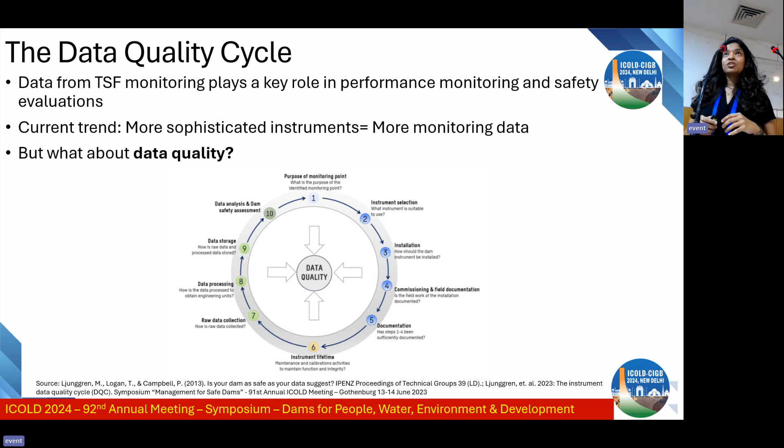So we try to look into this, but before that, whenever we talk about data in general, there is a cycle which we have been discussing over the past few days. The first thing is we need to design instrumentation - we need to design what we are trying to figure out from the instrumentation. It's not just because the instrument exists that you start plugging them in, just because we can. The first thing is if an instrument doesn't give you an output which is relevant, it's basically not needed. So that's where you start your design. And then you basically pick which instruments can give you this kind of output, and then you design where they should be strategically located.

The next part comes in with installation. So the installation has to be carefully done in a proper way so that the instrument performs the way it should. We spoke about how Pierre gave us an insight about how instrumentation installation can go wrong, and we saw that it can go wrong in a million ways, and there are even more million ways to worsen it even further. And then the main point is instruments don't live forever.

So they basically - okay, Anshad, you're supposed to be on the panel. Sorry, I saw you in the audience. I'm like, what is he doing there?

And then they don't last forever. So we need to keep track of how long they are going, and also keep doing a health check that they are behaving the way they should be behaving over a period of time.

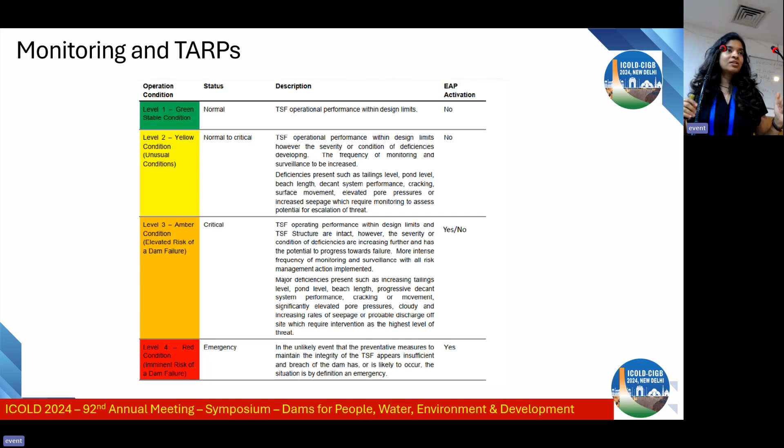And it was rightly highlighted in the last session that probably AI and ML are not there yet. Fortunately, we are not losing our jobs. So most people who work with designing or interpretation are still going to keep their jobs until maybe the coming one or two decades.

So with that, it's maybe interesting to open the panel, since maybe this has already been discussed in part, like not how much data is good enough, but what kind of instrumentation and how we should be careful installing it. Maybe we jump to the next section not yet covered: what kind of phenomena are we trying to monitor, and how good are ground sensors or remote sensing? What is good from a ground sensing point of view, and what is good from a remote sensing point of view? And can we really predict brittle failures or anything that goes, bam?

Does having a monitoring system or sensors on the ground or up in the air, is that good enough to at least sense that something is going wrong? And if so, when do the interpreters have the liberty to pull the plug and say we stop operations, we evacuate, we have to take action? That's part of the trigger action response plan. So how does this flow happen?

I think probably Malcolm can open, because he spoke quite a bit about how failure modes need to be identified and how we move to TARPs. Where do you think instrumentation fits in? But where do you think the interpretation part, which is the most critical aspect, comes into the picture?

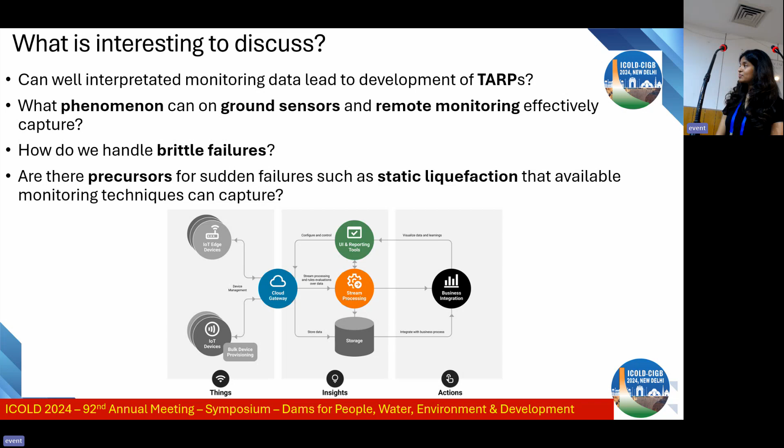I can always add to that operator part—also think through, if there's a yellow or red alarm coming, what's the context in which the operator is actually going to see this? Last year we had a small dam failure in Norway. There were no major consequences, no loss of life. But a water alarm went off and no one noticed it, and the embankment was overtopped. During the root cause analysis, it was clear this alarm was triggered multiple times over several hours. But at the same time, they had a 200-year flood event 50 kilometers upstream of this dam, so all the eyes were focusing on that part, and there were something like 200 other alarms also going on. So this alarm just drowned in the sea of alarms.

So thinking this through—are we relying on manual intervention for something to be safe? Then we really need to have redundancy and make sure that if it gets to a critical level, it really needs to go to the top of the priorities.

I think to sum it up, it looks like it should be a team effort. The people operating in the field and the people sitting in front of computers analyzing this data and looking at these alarms—they probably should be communicating.

The system should be well understood by all of them to know what's okay and what's not. For example, somebody on the field might have noticed the water levels going up, but never knew there was an alarm beeping. So it has to be an integrated team effort. You cannot rely on just instrumentation and automated systems to fix everything because you receive an SMS. You still have to think with your brain to decide whether to accept what the SMS sends you or not.

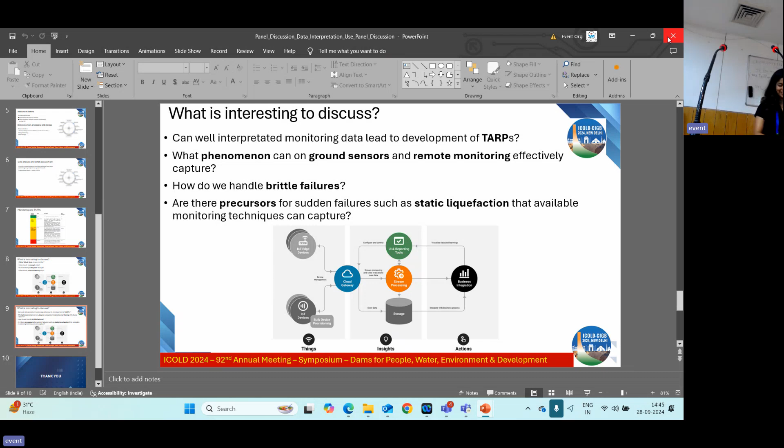I'm going to hand you over something. I think I've got some presentations for you, Vinod and Sasha. The others have already got them, I think, unless... no, I didn't. You other guys have? Alright, so come out the front. Thank you very much. You're also good, we shouldn't be photo bombing. Who's next, Sasha? Yes. Thank you so much.

Okay, so now we're going to have just a little quick session going back to our exercise. Hopefully you've still got your exercise sheets, because we've now learned how to collect all the data and interpret it. I want you to fill out the last two questions, and we're only going to have fifteen minutes. I know we've just had lunch, but we've got two choices: we can go grab a quick coffee and come back, or start doing presentations. I'd probably prefer to get a quick coffee and get on with it, but if anyone doesn't like that idea, that's fine too. We're going to do the exercise first, so grab your sheets. If you haven't got them, I can hand more out.

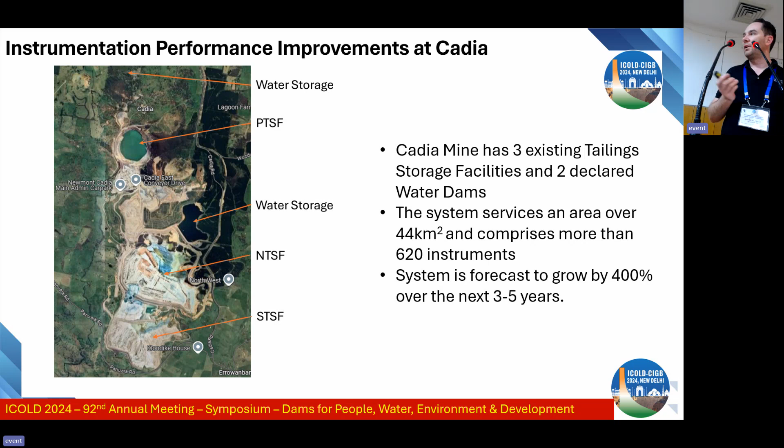Let everyone sit down before I start. Yeah, so we've got three existing tailings storage facilities. As you can see there, the NTSF, the STSF, and the PTSF. We're currently tailing into the PTSF as the other 2 are in care and maintenance following the slump in 2018. And we've got 2 declared water dams. We have a capital project which is repairing the NTSF and doing some pretty major buttressing works around both NTSF and STSF.

And Spectrum is working with that capital project to look after all the instrumentation. The 2 tailings dams combined cover an area of over 44 square kilometres. So as mentioned previously, they're quite large dams, very long embankments, multiple benches. So there's a lot of ground to cover for the guys doing the inspections. And we've got quite a large instrumentation system with over 620 instruments.

And that's not just piezos, there's ShapeArrays, a number of radars, that sort of thing. With all the planned construction coming over the next 3 to 5 years, we've forecast that we're going to see the system grow by over 400%. And that's a bit of a rubbery figure, but we've got a definite 100% growth in the next 12 months just from designs that we've already got.

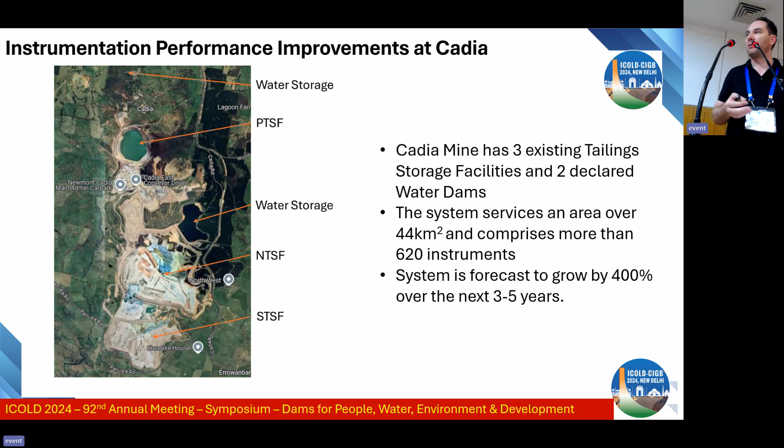So the challenges that we had when the project took over the instrumentation system, take a step back. The project is responsible for the instrumentation for the NTSF and the STSF and the water dam, which is directly adjacent to it. The other two, the PTSF and the other water dam, are still monitored by the site.

So the challenges that we had when we took over the system was it was a system that had been installed in a hurry post the slump. So it worked, it did its job, but it was now five years old. A lot of the hardware that had been used was off the shelf, and wasn't necessarily fit for purpose. And because it had been installed very organically, it was very complex with minimal documentation. So that made it difficult to maintain, difficult to diagnose any issues, that sort of thing.

And we saw that in a huge number of TARP triggers for loss of instrumentation or loss of comms. So we were experiencing too much of an impact from instrumentation on the construction project itself. And as already mentioned, an instrumentation system that's always triggering the TARP for reasons that people don't think are real is like the boy who cried wolf. People stop believing the system.

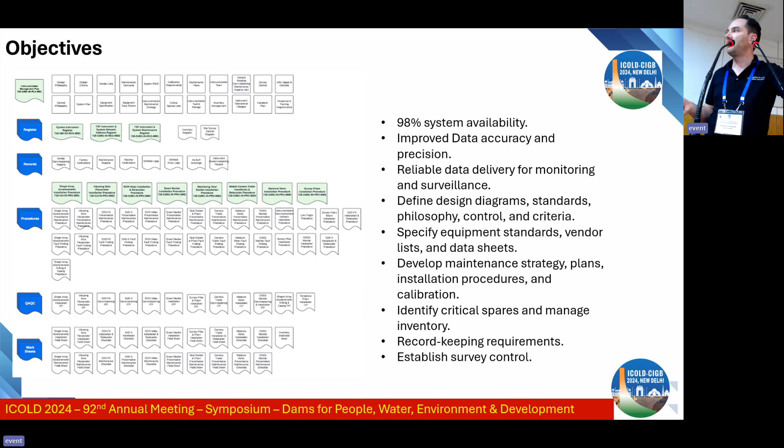So what you probably can't read, but that's all the documents that we determined needed to be developed. Overarching is the management plan, and then we've got all the standards, the procurement specifications, installation SOPs, ITPs for installation, that sort of thing. And that system has been developed so that we have the full record keeping required for future use. And obviously, being a capital project, we need to hand back a system that's properly documented to operations when the project is done.

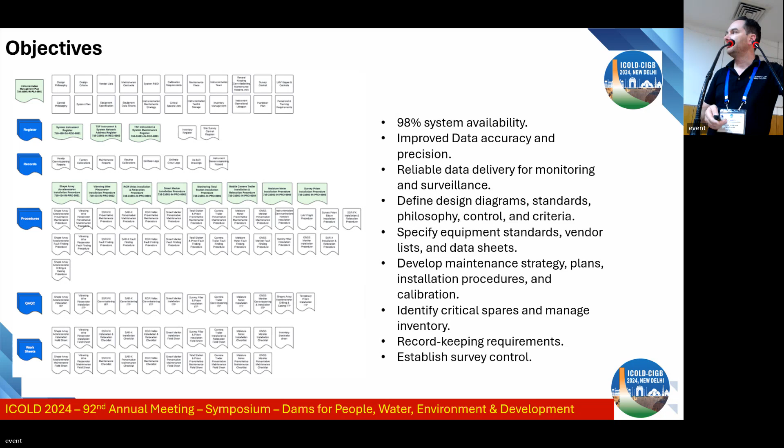So the design philosophy that we developed really prioritized standardization and simplicity across the entire system. We didn't want our technicians to be going out there and opening a cabinet and seeing something different every single time. We want them to know exactly what they're going to see. That makes it far easier to diagnose problems, and it makes it cheaper to maintain the system as a whole. You need less critical spares, you need less models on hand, that sort of thing.

Key here is all the instrumentation should inform the TARP. All the instruments should inform the TARP.

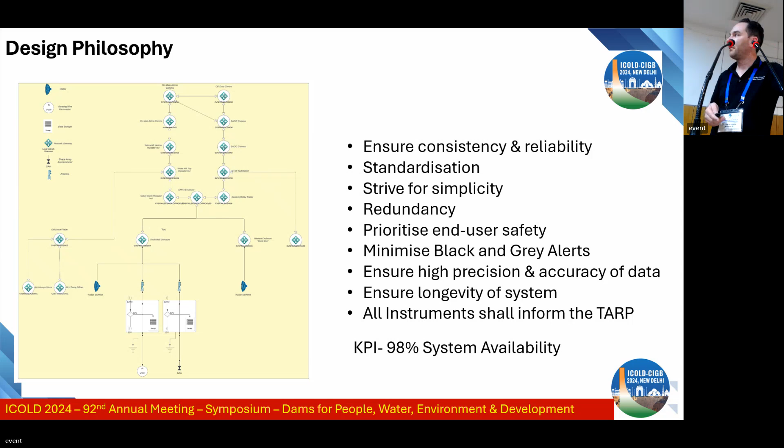So to start off with, we started looking at the prism network and the total station network and developing a robust survey control. Previously, the control had been set out by geotechnical engineers. Nothing against geotechnical engineers, but you're not surveyors.

So we had control on the embankment, which we knew was moving. That's obviously not ideal. We're still in the process of establishing a robust control network, but the control network really needs to have redundancy in the backsights, cross-bracing triangles in the control network, and the total stations should always be computing using least squares. Previously, they had been set up with just fixed points, so the total station was never recalculating its own position. So if you did get any movement in the total station, that movement was then translated into the embankment, which obviously gives you false positives.

And going with that includes having a proper maintenance, calibration and repair regime for not just the total stations, but the pillars themselves. We've got pillars out in the farms, cows can rub up against them, farmers can run into them. So you need to go out there and check them periodically, make sure they're still in place and don't need any maintenance.

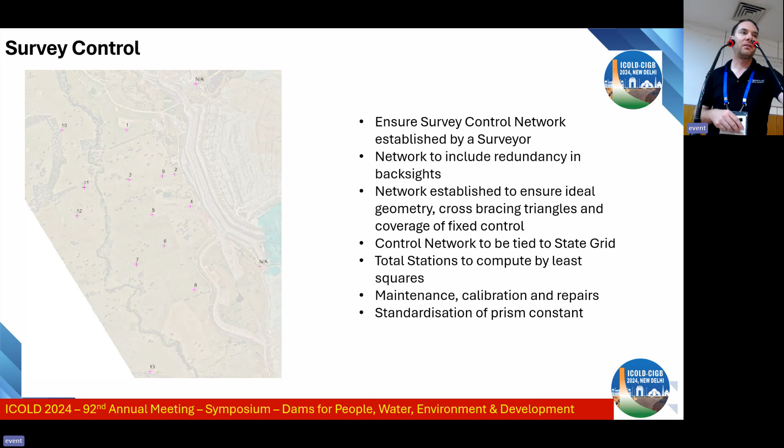Criticality. So when we were installing all these instruments and all the existing instruments, we assign a level of criticality to that instrument, and that then determines the effort put into its maintenance, and how we look after it when it does trigger. The criticality of the instrument is really driven by the FMEA. It has to be, it has to come from that.

And I need to make the differentiation here between a critical instrument and a safety critical element. So safety critical element, you may not have come across it before, but it comes from process engineering, where if you say this instrument is critical, then that instrument and all its supporting infrastructure that lets it do its job becomes a safety critical element. And if there's no redundancy, then you have to address that and maintain all that hardware differently. So the safety critical elements can be the instruments, the power, the comms, the cables.

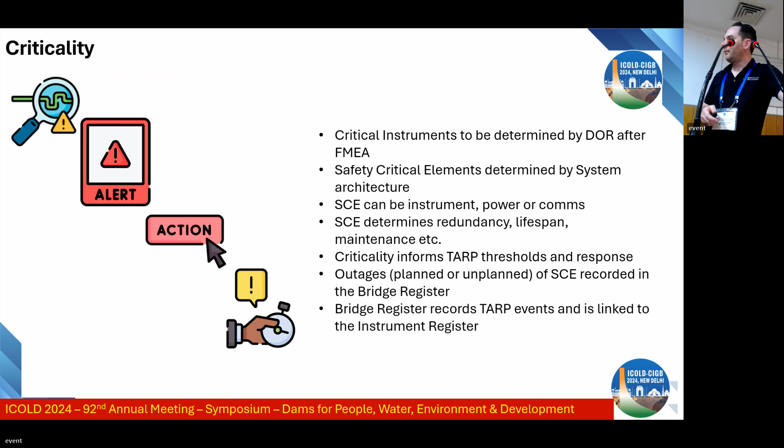And that then flows on and determines how much redundancy they have, how much lifespan you need from them, and as I said, the maintenance effort. And then any outages of instruments or safety critical elements are recorded in what we call the bridge register, which also records any TARP events.

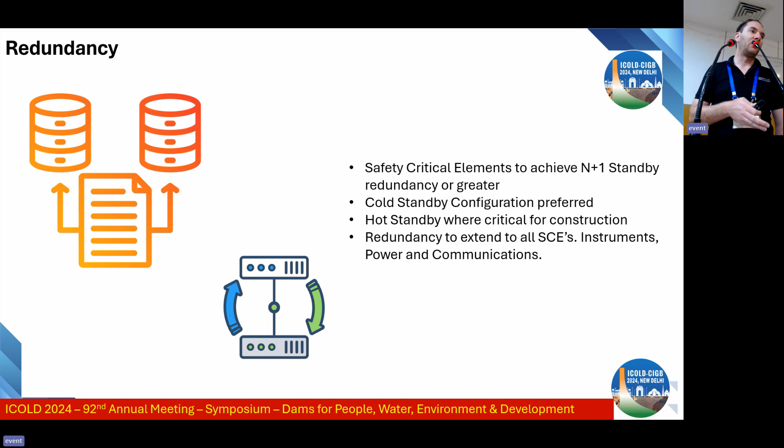So redundancy, it's been touched on a few times already. For safety critical elements, we have determined that a redundancy of n+1 in a standby redundancy or cold standby configuration is preferred. So that means, take for example a modem, like a comms modem, if you say that's a safety critical element, you have a second comms modem in the same cabinet. Cold standby means that it's not turned on, so if the one that's operational does go out, you send a technician out there and you turn on the redundant ones. The decision to be cold standby or hot standby is based really on construction and cost.

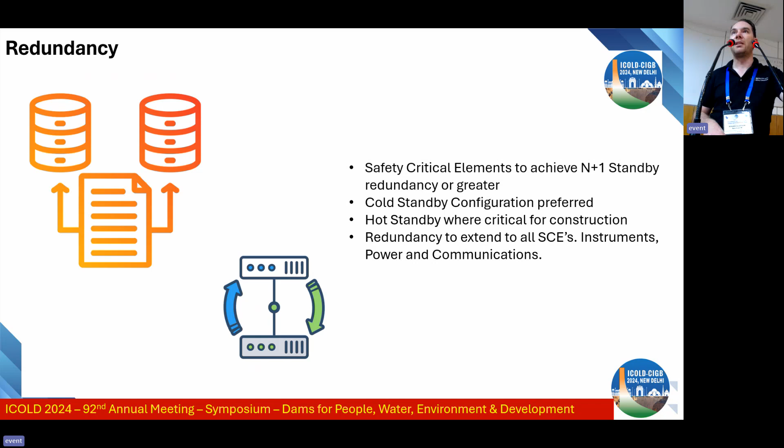We have some instruments in hot standby where we don't want to wear the cost of stopping construction, it takes 45 minutes for someone to get out there and flick it over. In other areas where we won't stop construction, we can afford to have it in cold standby, and that just extends the lifespan of that redundant piece of equipment.

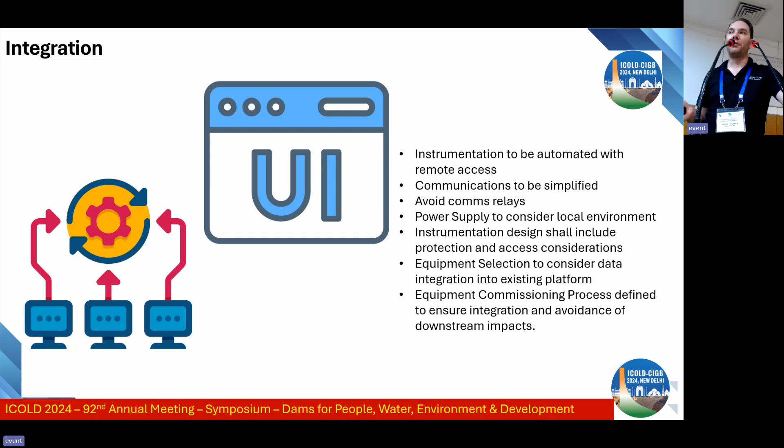Integration. All our instrumentation should be automated with remote access and integrated into a single platform. As mentioned, we have Canary, but we do have some instruments that don't go into Canary. Our radars don't go into Canary at the moment. They're a bit of a tricky one.

Currently we've got about 7 different platforms that the dam governance team and the geotechnical engineers have to monitor, and then try and cross-correlate to identify trends, which isn't ideal, and it really brings about a lot of decision fatigue for these people doing this job. So trying to integrate all the data, as already mentioned today, is very important.

As I mentioned when I was on the panel earlier, the equipment commissioning process needs to define integration, to avoid downstream impacts, like huge amounts of data flooding your server or saturating your comms.

Standardization - I've touched on it already. We have standardized all our cabinets, so they all look the same, across different instruments. This reduces complexity and really simplifies personnel training and familiarization. Our technicians know exactly what they're going to see when they go to any instrument because they all look the same.

The standardisation extends to installation procedures and safety setup around the instrument itself, so they all have a standardised general layout. If they're on the embankment, they have a hand railing, an LV park up, that sort of thing. They have bollards to prevent HVs from running into the instrument or our technicians while they're working there.

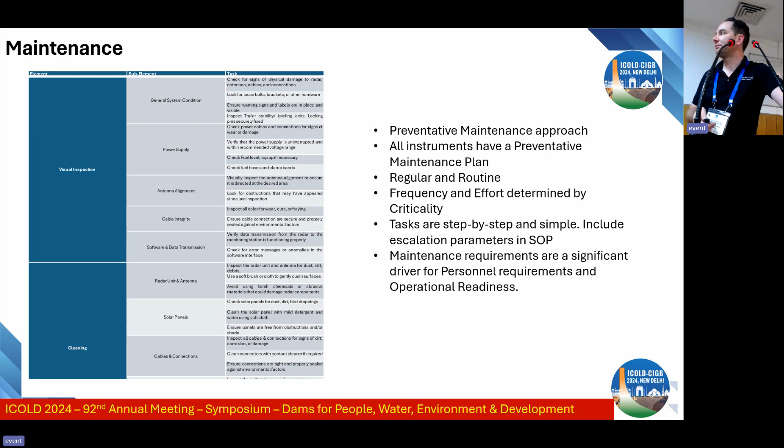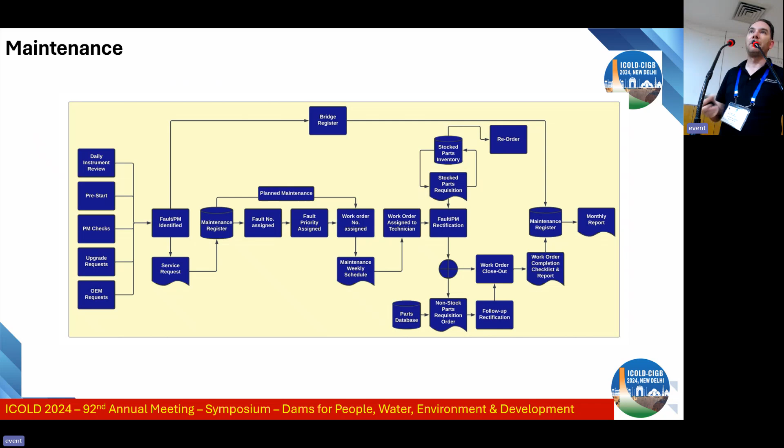The lifespan of the instruments is pretty critical. We've decided that any non-repairable or non-replaceable instruments should have a minimum OEM lifespan of 20 years. Obviously that's dependent on how they're installed and maintained, but we don't want to be installing instruments that only have a stated lifespan of 5 years. Shape arrays, for example, I think they state 45 years in the manual, if installed correctly and maintained.

But yeah, the lifespan is determined by the OEM, and then we do everything we can to keep it running for as long as possible. And you need to schedule end of life replacement.

If it's still working, don't be tempted to try and save a few dollars by not replacing it when it hits end of life. Replace it on failure or on end of life, whichever occurs first, because the likelihood is that you'll try and save a dollar, and then 6 weeks down the track you'll fail anyway, and then you'll be doing an unplanned replacement.

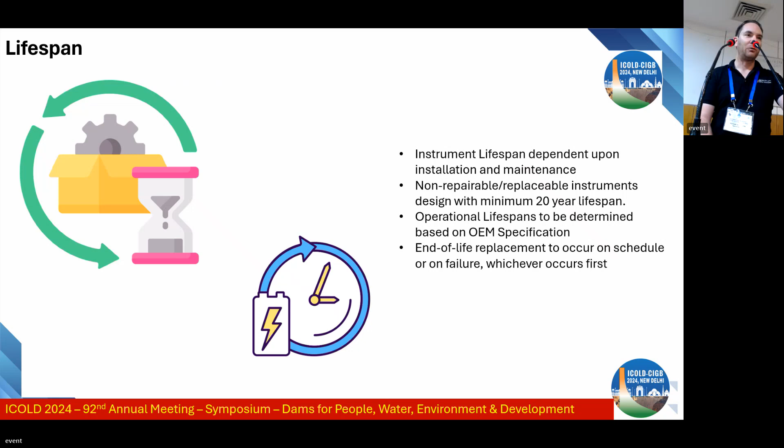Record keeping - so every single instrumentation relocation or installation has an ITP that's been developed. We've got personnel training and competencies all recorded and specified in the management plan.

Critical inventory is stored - we actually run a very small sort of warehouse using warehousing principles. And then obviously all the instrumentation installation records, all their calibration certificates, all the zero readings.

You have to have that on hand for the EOR and the DI to be able to set the thresholds. And also the installation records, like the grout records, are very important for problem solving - when you start getting some strange readings from some of these instruments, you can try and work out what's going on with them.

Vendor agreements - we may be lucky where we have pretty deep pockets at Cadia, but vendor agreements, I can't stress how important they are, especially for the more complex instruments we have out there. There's no way my team is going to be able to do medium and long-term maintenance on radars, for example. So you have to have the vendors coming out regularly to do this medium and long-term servicing on these instruments. And it also, lawyers like it because it moves some liability.

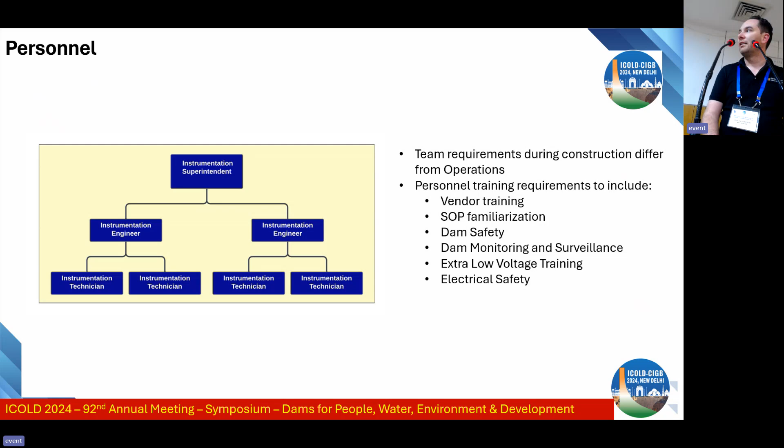And there are some pretty unique training requirements, and the skill sets for something like an instrumentation technician is, as I'm finding, very unique and very hard to find.

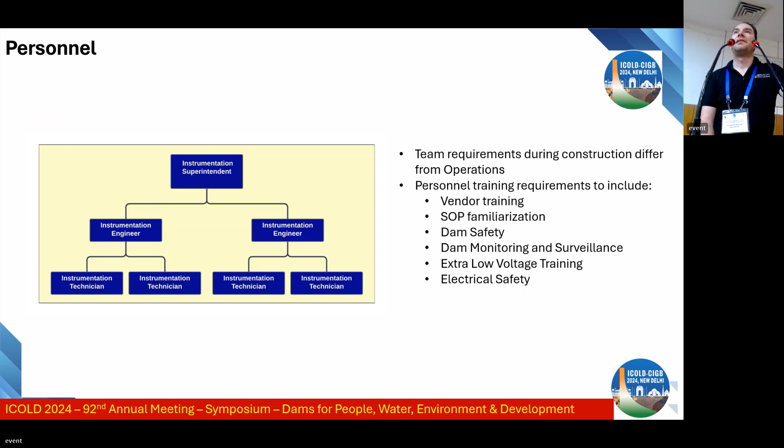So all of that comes into the dam monitoring instrumentation management plan for us at Cadia. This document is subordinate to the OMS and supports the OMS. It just essentially provides that greater level of detail. It'll be reviewed annually, but it is a live document which is linked to live registers, and all changes that occur in the registers don't actually require too much updating of the document itself.

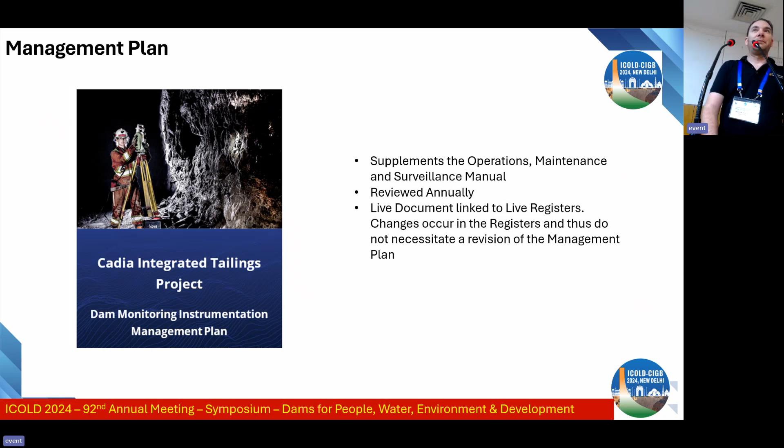But having this document is really important and has really benefited us in that it's highlighted the importance of instrumentation to all the construction guys, and they finally understand don't go out and run over a shape array, otherwise it costs the business a lot of money in downtime and in replacing that instrument.

Operational time for us is 6 a.m. to 6 p.m. A 42% reduction in TARP events, and my crowning glory, I suppose, is a 39% reduction in the single event duration — that's the time it takes when we do have a TARP trigger, for the instrumentation team to get out there, diagnose the problem, and get the system back online. Yeah, so that's it. Thank you.

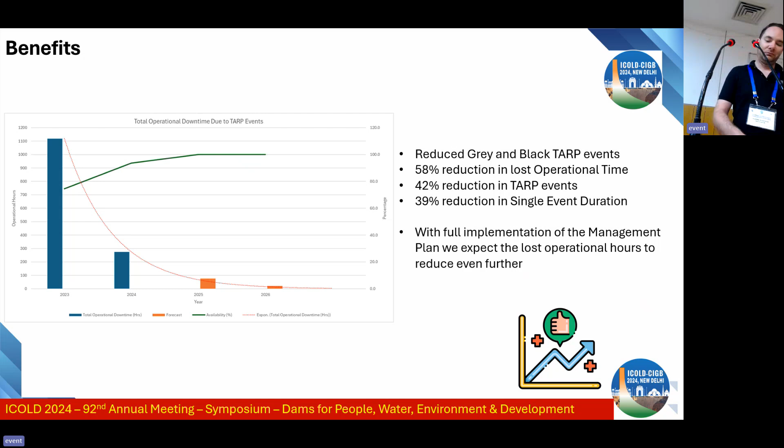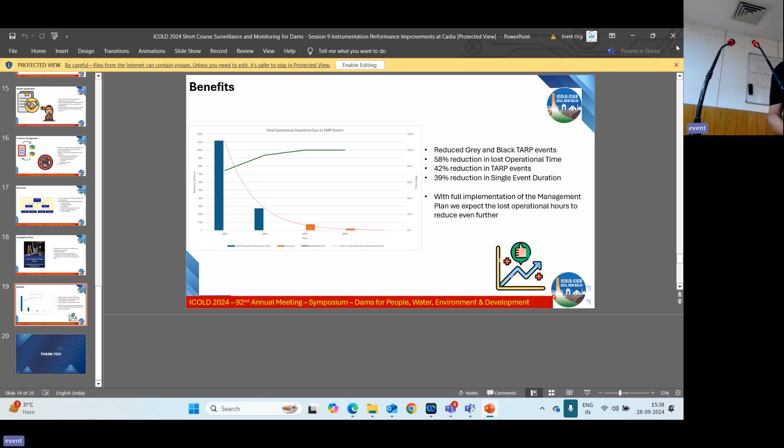Well, I think, thanks, Brian, and I guess maybe people don't understand what those figures mean because the construction operations on site is just absolutely huge. Like you've got the biggest trucks in the world and massive production in millions of tons per annum in construction works going on. Yeah — 40,000 tons per day.

So we've now been lucky to get a last minute presentation from Andrzej Krishnik from Poland. Andrzej is the leader, the manager of the monitoring team at KGHM's dam in Poland, which I understand is one of the bigger tailings dams in Europe, and it's got a pretty amazing instrumentation system by the sound of it. So over to you, Andrzej.

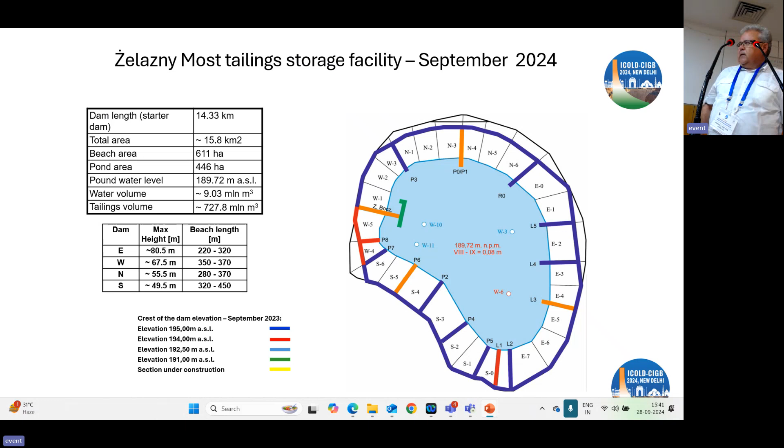Mine facility just got the elevation, crest elevation 195 meters. The highest dam height is more than 80 meters. And total area of mine facility is 15.8 square kilometers.

Tailings division manages a line of pipelines - water line pipelines and slurry pipelines - and total length of pipelines is over 250 kilometers.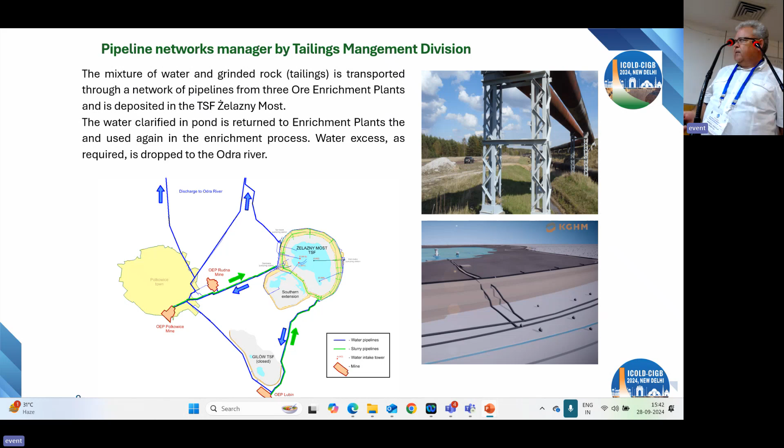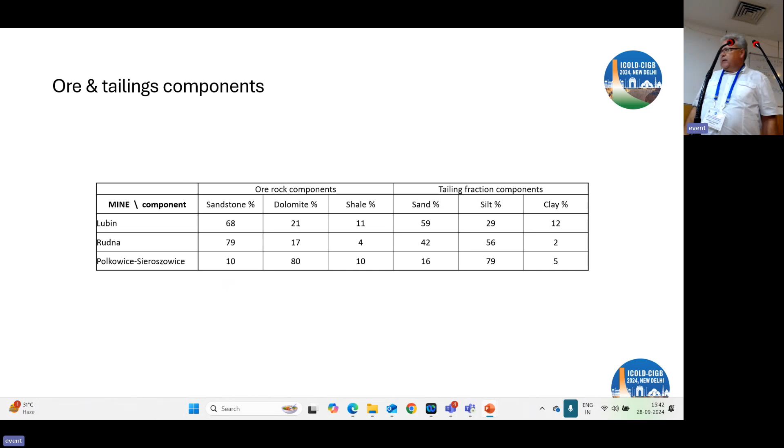Tailings composition depends on the mine. In Lubin and Rudna mine, most of the rocks are sandstones. In Polkowice and Sieroszowice, it's dolomite. So the components are sands to silts, and tailings from Lubin and Rudna mine can be used as building material for dams.

We have two different methods for exploitation. Main object is built with upstream method, and southern extension is downstream method.

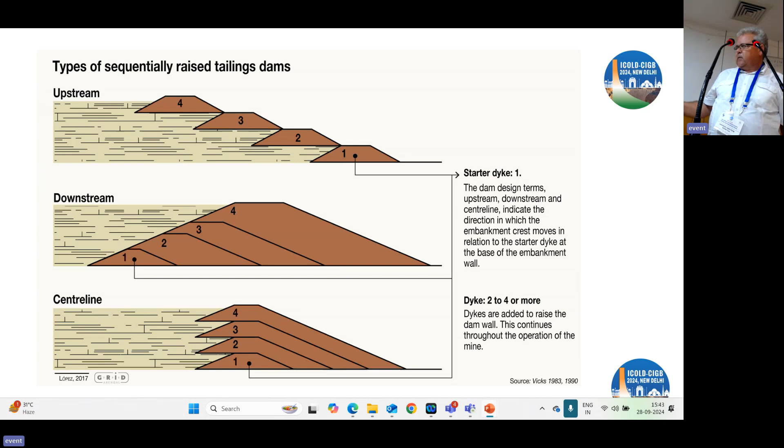Our TSF is located in the Kalinówka Brook Valley. We don't have mountains near our TSF. This image is 10 times exaggerated.

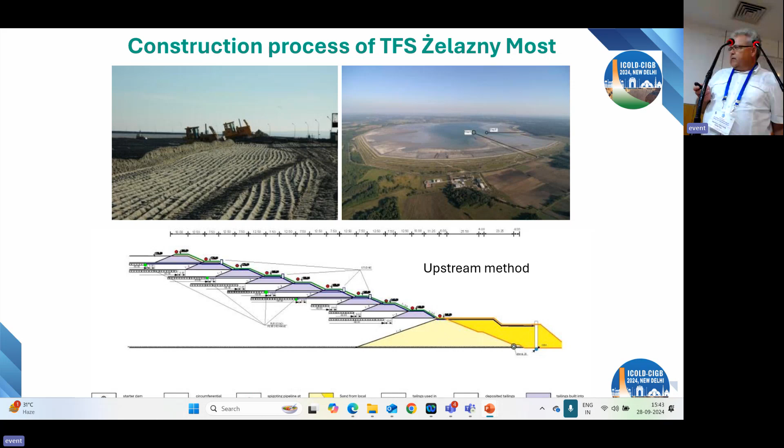This is the upstream method in the main facility. At the start, there was built the starter dam with starter dam drainage. After that, it's built from sand from local deposits.

The next shelves dams are built from sand tailings. Very important, there is circumferential drainage, which is constructed after we construct the dam crest.

We have very complicated bedrocks, mixed by glacier, so we have to use drainage and relief wells. This is a starter dam for main facility.

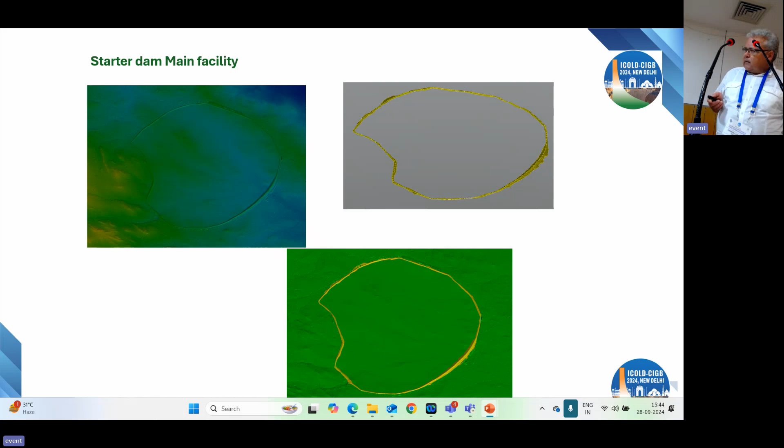The main facility is divided into 26 spigoting sections. We spigot tailings on the beach, where tailings are naturally segregated into sands and finer material, and sands are used for building the next shelves.

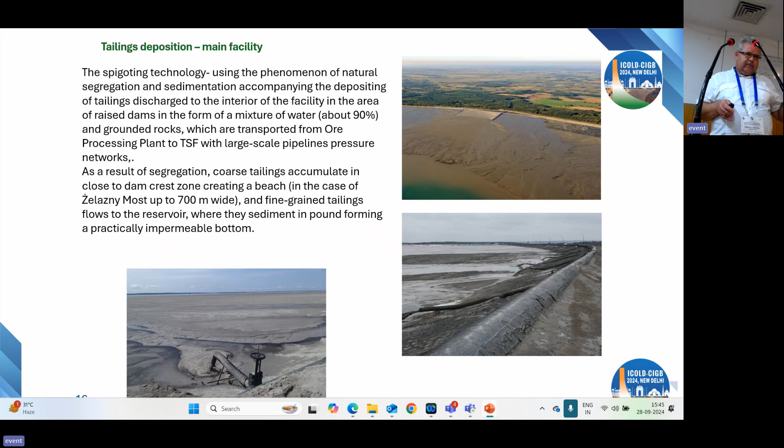The fine material is put into the pond, so it seals the bottom. It stops vertical infiltration into the groundwaters.

After filling the spigoting section, we construct the next dam, and it's very important we control compaction. We are using Troxler and laboratory tests and CPTU test for control of compaction.

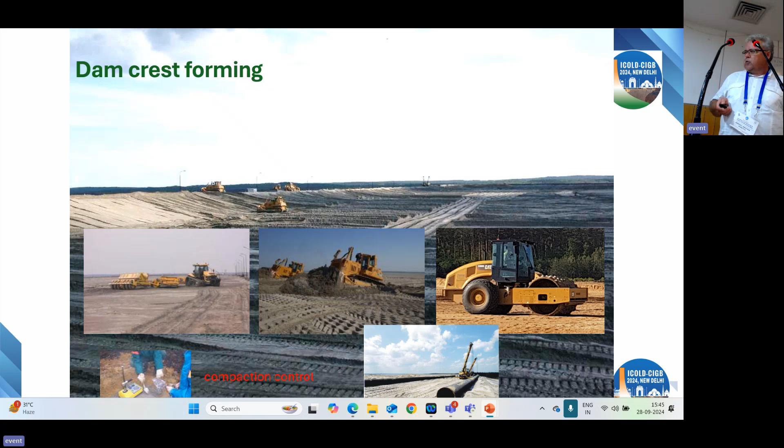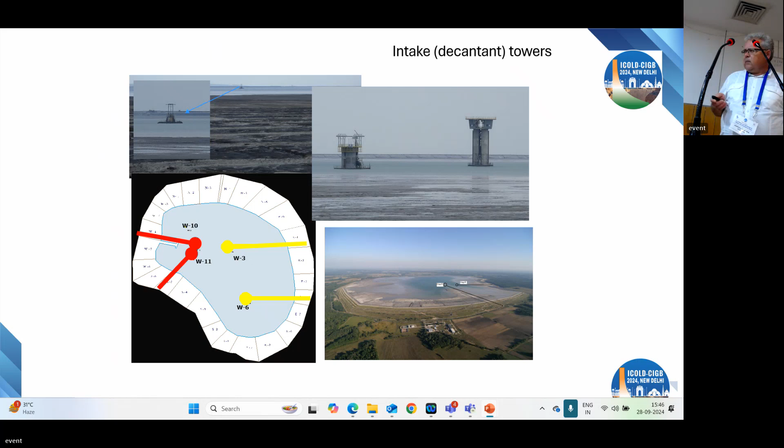Every construction is divided into 2 stages, increasing dam by 5 meters. Every stage is 2.5 meters.

After this stage, we make additional geotechnical laboratory tests to establish geotechnical parameters. We install additional monitoring devices. After that, stability is calculated, and then we start with another stage.

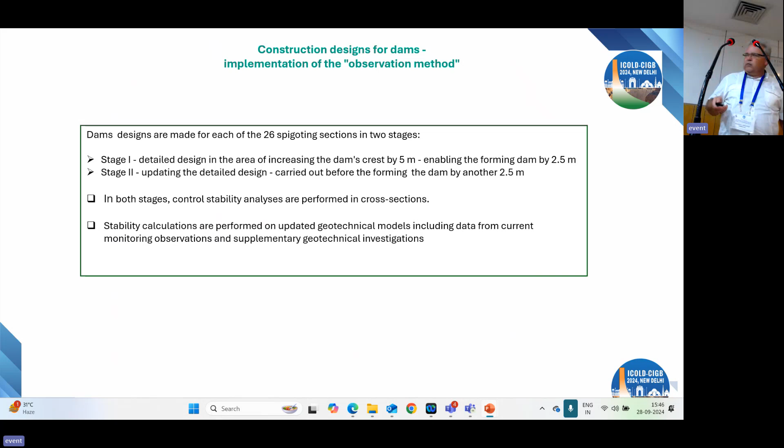Circumferential drainage is built almost every 10 meters. These are perforated pipes around the facility, and after that we build the drainage wall. It's almost 10 meters high, and it's a very important element for creation of the phreatic line.

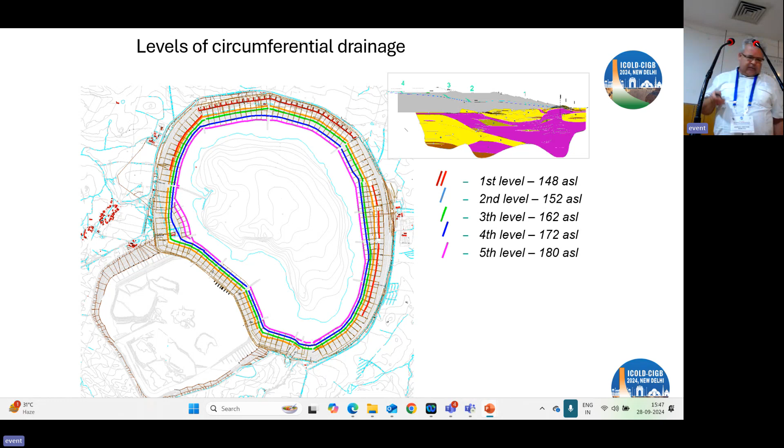On the southern extension, there is a different method. We start with starter dam from sands from local deposits. Base dam is constructed from sandy material from tailings, and segregated and compacted fine tailings are located in the middle of the extension. This is a starter dam.

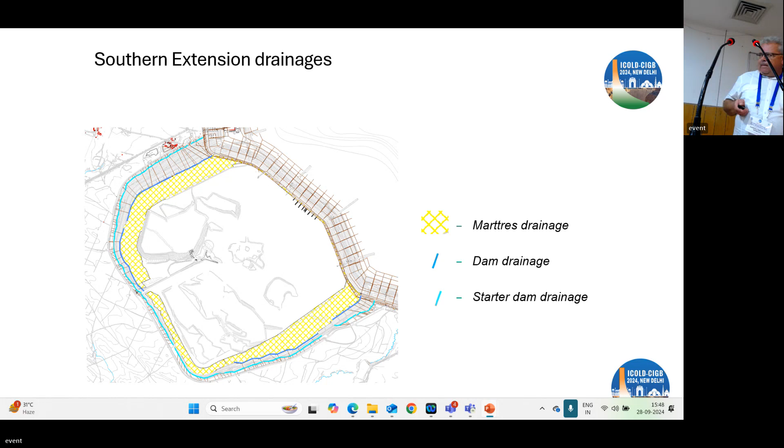Drainage in the southern extension has a different construction. There is a mattress constructed from crushed rock, and slag from smelters is used as filtrating material, and it's constructed on the impermeable mat.

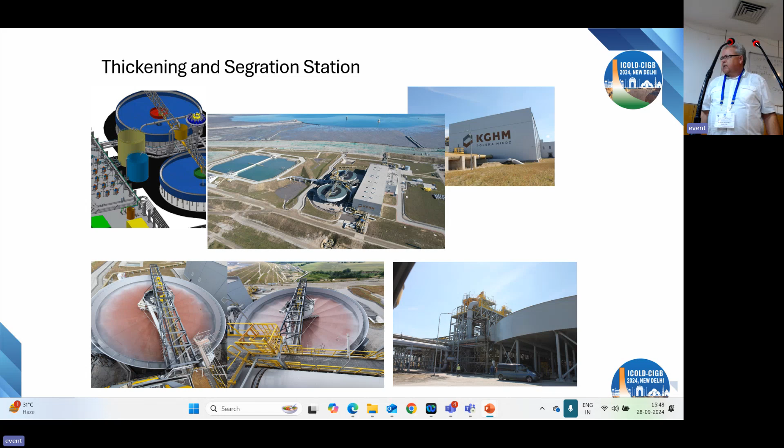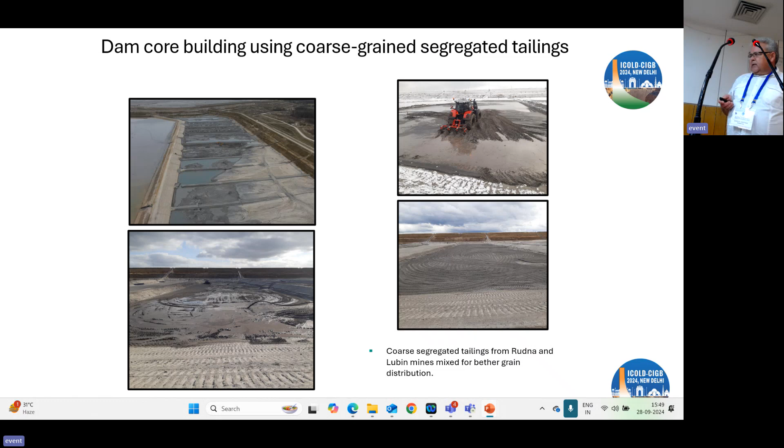For exploiting the southern extension, we built the new thickening and segregation station. This is the dam core built using coarse-grained material. We have to mix this coarse sand for better grain distribution.

The fine tailings are just put inside. At the bottom of southern extension, it was covered with clay to stop vertical infiltration. Water intake is floating intake.

Now we are going to monitoring. So we have normal operation inspections, provided by exploitation forces. Additionally, this is monitoring team controls - visual inspection of all objects, especially drainage system, condition of measuring devices, and any observation. Once a month we have building council.

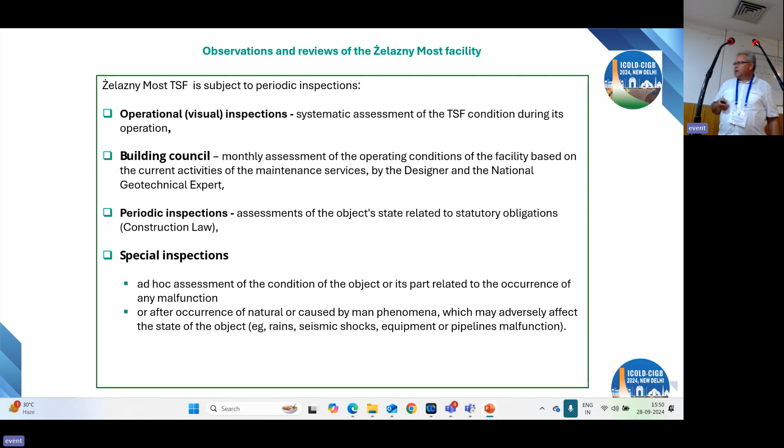This is a meeting when we prepare data for designer and our experts. Twice a year we have periodic inspection - a meeting of designer, experts, TSF representative, and representative of construction law, Polish authorities.

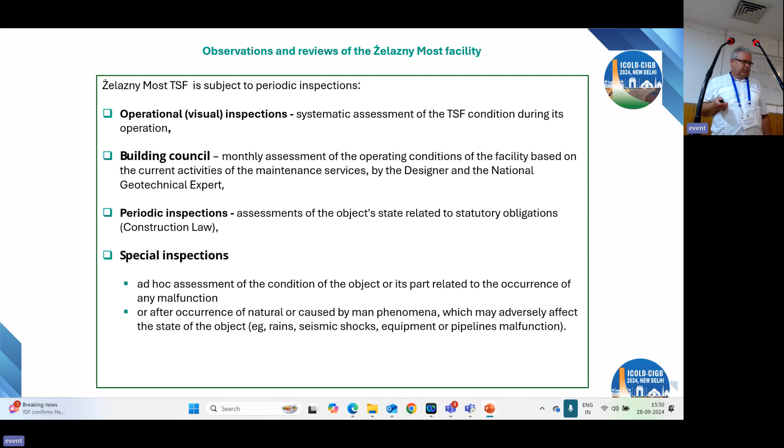And we have special inspection if something happens. These are elements of inspection.

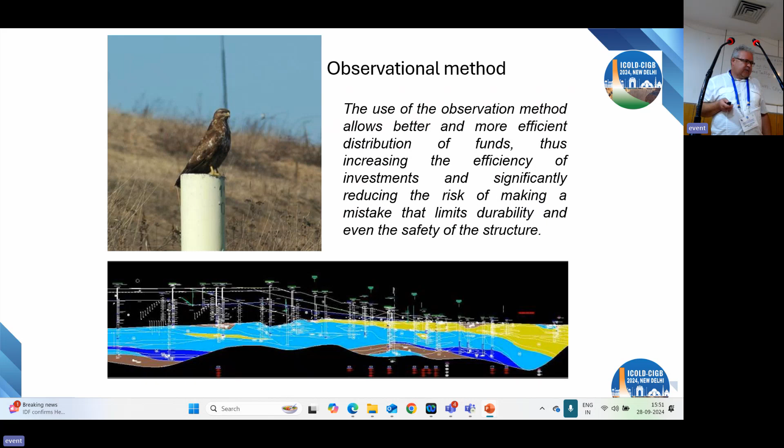So we are using the observational method in designing our TSF. We are installing a lot of measuring devices. We make laboratory tests to get ground parameters, and after that the design is modified to avoid any problem.

We have two kinds of monitoring: research monitoring and warning monitoring. The research monitoring is much more important because we don't want to get to warning monitoring.

Because we have a long history, all time we are doing research, so we have more than 4,000 boreholes in the area of Żelazny Most, and a lot of measuring devices.

The information is very important for the general designer, national experts, international experts, and for building councils.

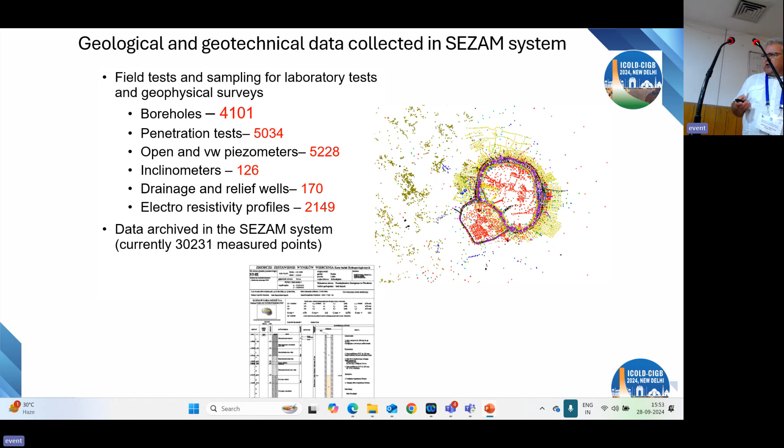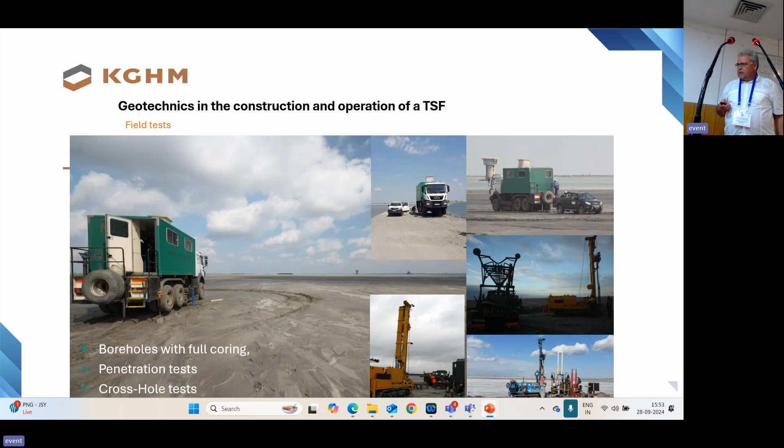Measured points are places where we have an observation or where we have installed measuring devices. We are the owner of 2 CPT test rigs, so almost every day we are doing different kinds of tests. New boreholes are done and new apparatus are installed.

We have together more than 200 cross-sections perpendicular to the dam, and more than 100 are used for stability calculation. These are geotechnical cross-sections, and we are using different kinds of in situ tests, CPTU,

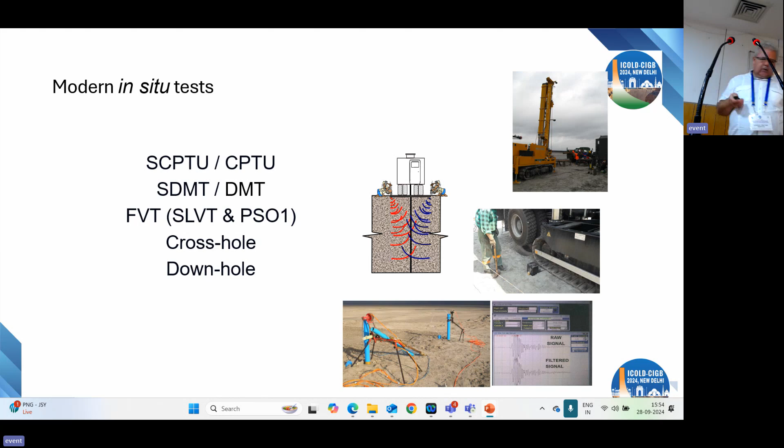CPTU, SCPTU, SDMT, FVT, crosshole and downhole - these are geophysical measurements. We bought a special sampler for taking undisturbed samples from uncohesive soils. This is a Japanese push-gel sampler.

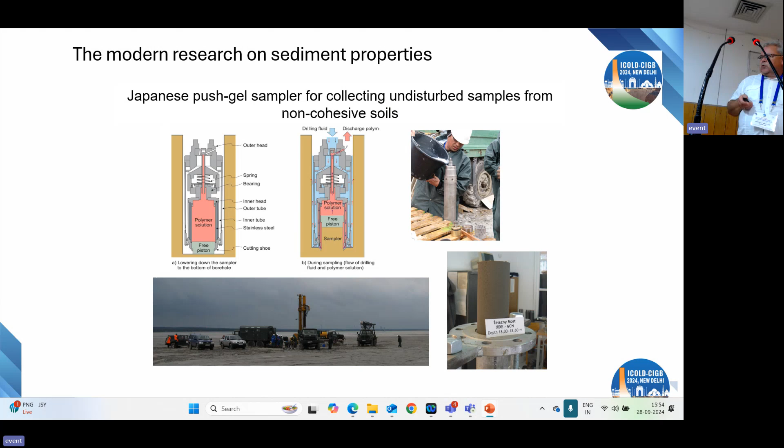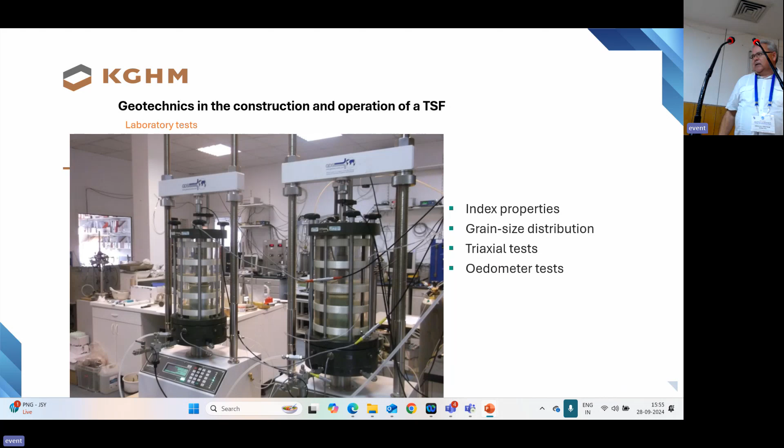We have special apparatus in laboratories, triaxial tests with very high pressures and different kinds of measurements and tests to establish parameters of tailings and underlying soils. These are existing working devices.

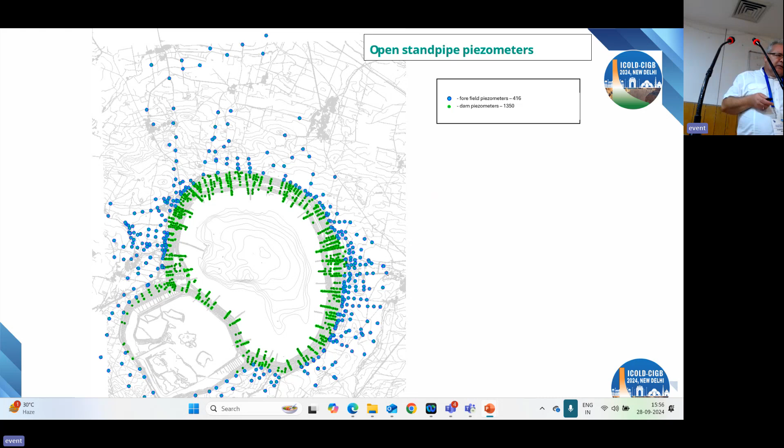We have more than 1,700 working piezometers, open pipe piezometers. The green ones are located on the dams for different purposes. One is observing the phreatic line. Another is controlling the working of drainage. More than 100 are working in automatic mode.

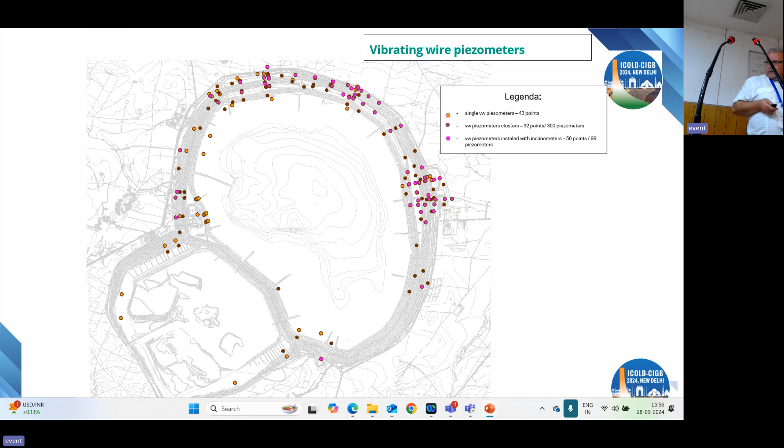We have almost 400 wire piezometers. A digression: we have bad experience installing wire piezometers with inclinometers. We just saw piezometers reacting to changing water level in inclinometers, and we had to turn off exploitation of more than 30 piezometers.

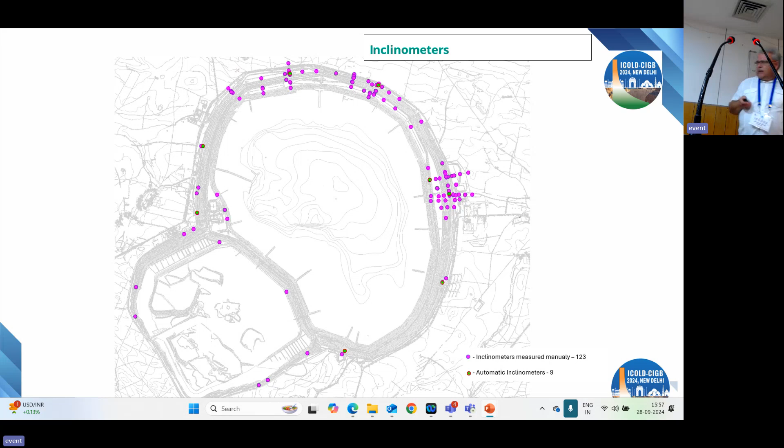We are using the fully grouted method, and we have 123 manually measured inclinometers and 9 automatic ones. They are quite deep - now the deepest one is 230 meters. The shallow inclinometers, 28 of them, have less than 79 meters depth.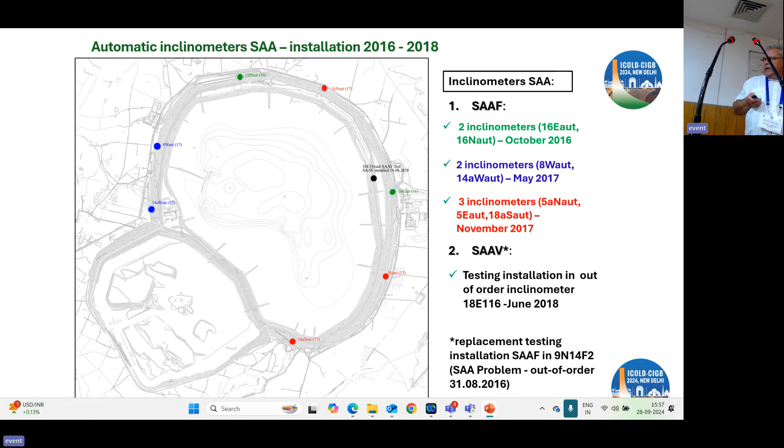Automatic inclinometers, most of them are SAA-F, these are shape arrays for measurements, and we have one SAA-V. This is a very good way for monitoring underground displacement. So we compared manual inclinometers and automatic ones, and the quality and quantity is very similar.

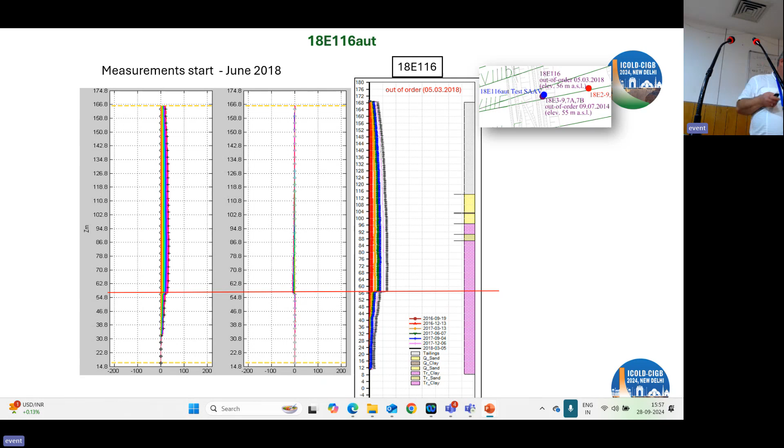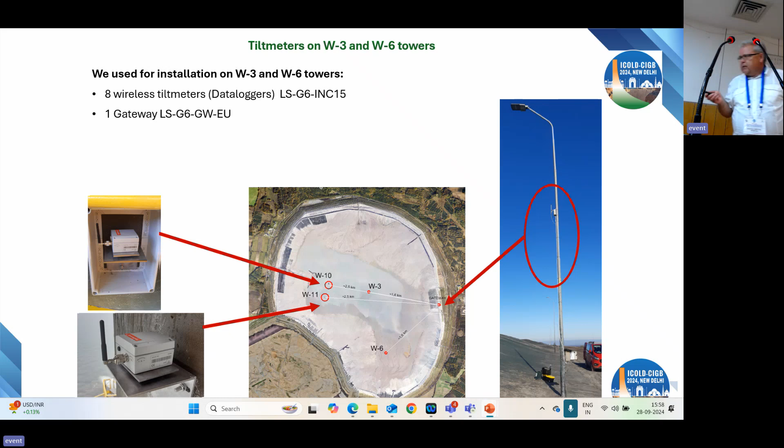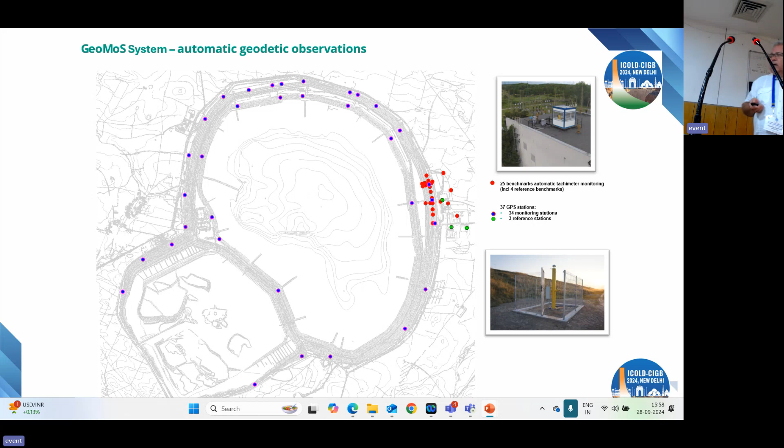We have 8 tilt meters located on our intake towers. For geodetic points, we manually survey more than 1,000 measuring points, and we have the GeoMoS system. This is tachymetric, with 25 measuring points, and 34 GPS stations.

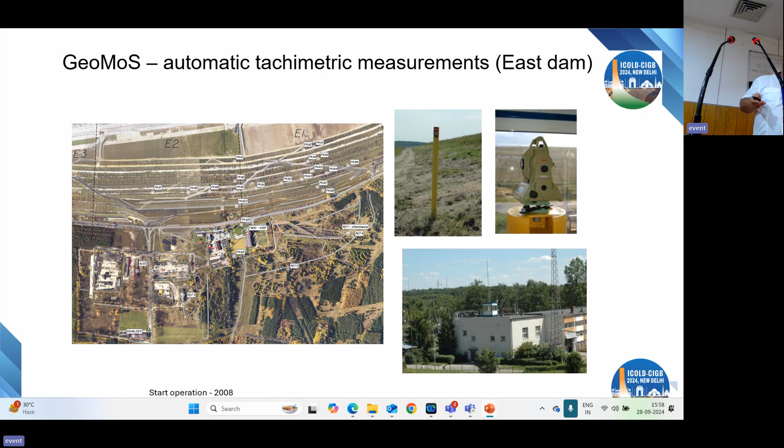We are going to switch off the tachymetric measurement because there is a building area, so we lose visibility of the tachymeter and measuring points. These are GPS stations.

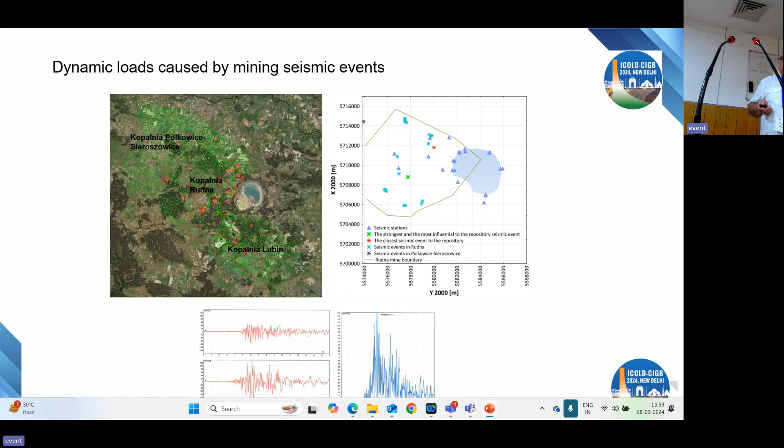We have 17 accelerometers and 2 seismometers located on our dams. It's not all of the KGHM seismic devices network, because mines have their own devices across all mining areas. So data are automatically collected in the LITOS system, and after that they are exported to our system.

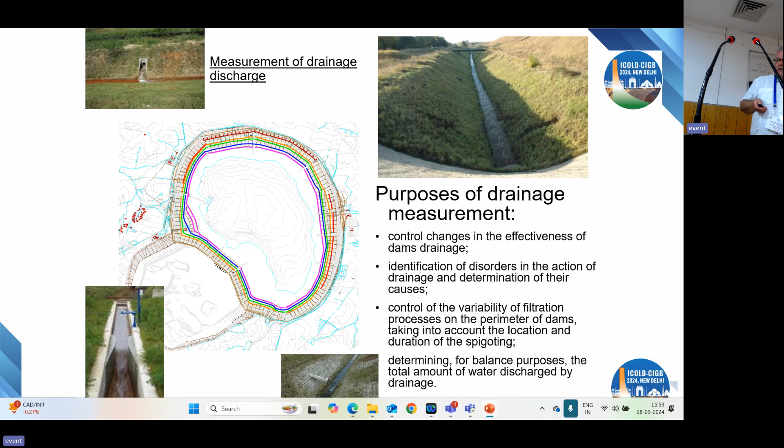There are more than 700 measuring points of drainage, and very important, these are relief wells. These are wells which have filters installed in cohesive ground, and the role of these wells is to reduce pore pressure in clays.

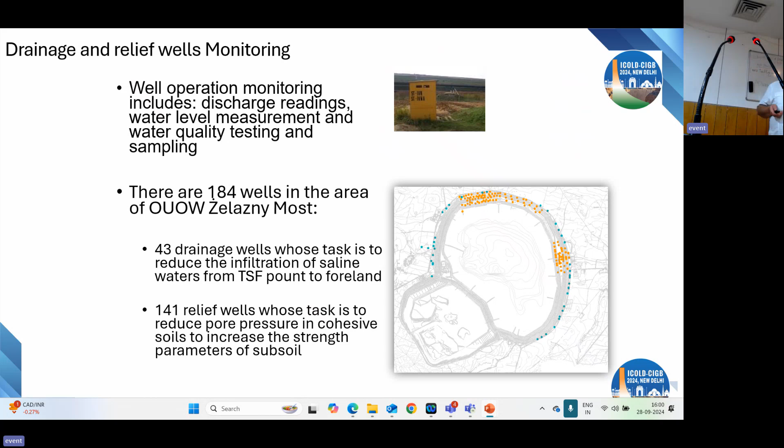This visual inspection path covers all facilities, and our people have to check all important places. We have a linear monitoring system - these are wires around the dams on 4 levels, connected with water level measurement. And we can switch on the alarm for surrounding villages.

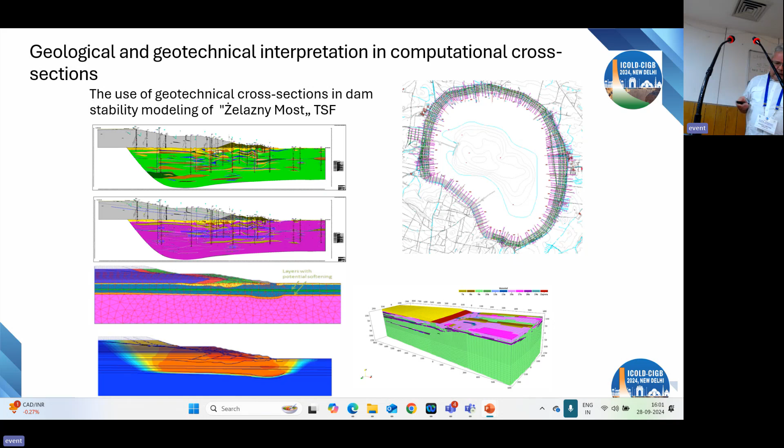Very important is collecting geotechnical parameters, so all measurements are taken into calculation of stability. There are different models used for calculation, and the last is finite element 3D modeling.

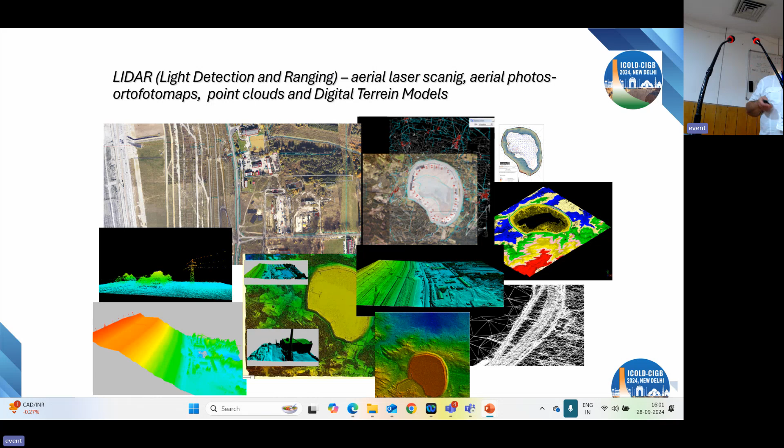We are using LiDAR data for all areas once a year. We have to use an aeroplane for that, and we use drones for local purposes.

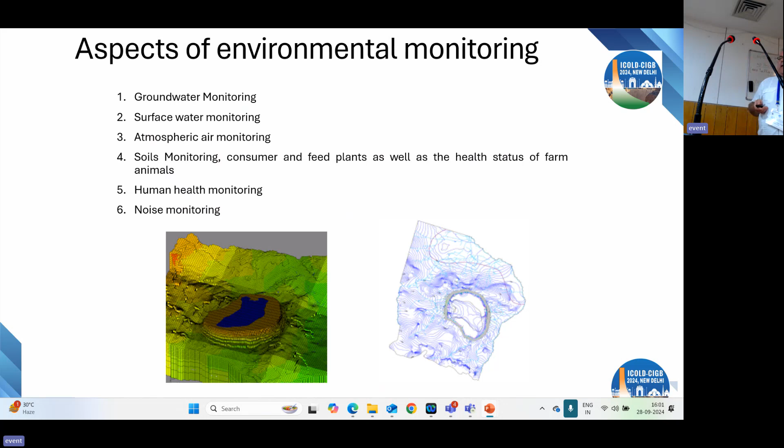Environmental protection: we have groundwater monitoring, surface water monitoring, atmospheric air monitoring, soil monitoring, consumer and feed plants, as well as health status of farm animals, human health monitoring, and noise monitoring.

We introduced a special system for us, this is an ORAC database with a map and all geological, geotechnical information, construction of our measuring devices and its parameters. It contains terrain models and cross sections, and very important is an app for telephones.

The main function is collecting data and automatically sending it to the system. And another function is in-field data verification.

We are cooperating with Polish companies from different places. They have access to our system, and they can manage data, use it for calculation and documentation. We cooperate with Polish contractors, with our general designer.

This is Hydroprojekt Wrocław. Now we don't have international experts - 3 years ago they decided to retire, but it was Professor Jamiołkowski, Karl Heck, Richard Chandler, and David Curry. So that's all. Thank you.

Hello, guys, please hold tight, it won't be long, I promise you. I don't know about you guys, but my brain is boiling. It was a very good time with you guys, very dense and a variety of options on monitoring and surveillance monitoring. Thank you for all of us that made the effort to make this happen. I'm very happy to share this time with you today, guys.

How does it work? Oh, the laser, where's the laser? How does the laser work? Sorry guys — not this one, you just change the — oh sorry, it's supposed to be this way. Oh yeah, oh good stuff, thank you mate, no problem. So we just go back to — I made a mistake, right? Okay, good stuff.

So my name is Leandro, I'm from KCB Australia, and today I'm going to be discussing case histories of Hidden Valley and the hierarchy of controls. We've discussed a lot about surveillance and monitoring already, and my intention today is to give a different perspective on surveillance and monitoring — that's the approach I took when I thought about this presentation.

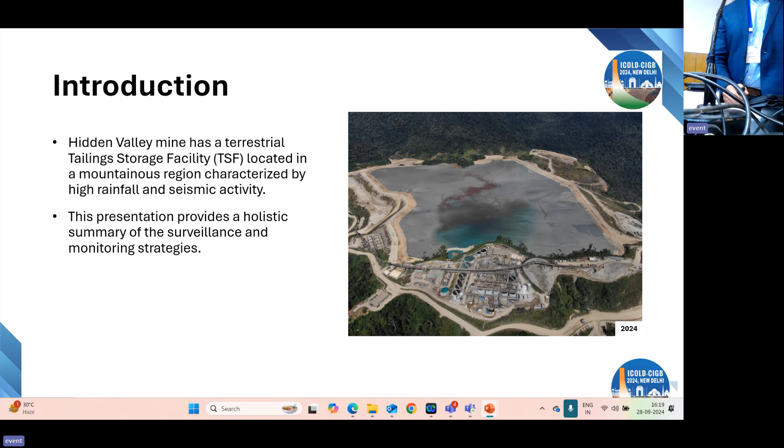So, Hidden Valley mine — oh, I think it's not this, oh is that right, yes, that one. Hidden Valley mine has a terrestrial TSF located in a mountainous region characterized by high rainfall, 3,000 millimeters per year, and in a seismic activity area.

Hidden Valley is located in PNG, 200 kilometers northwest of Port Moresby — the latest, yeah, it's here, it's located here. It's owned and operated by Harmony, a South African company, and they process circa 4 million tons per annum of gold and silver. This is the first successful large-scale on-land tailings storage constructed in Papua New Guinea. It's a very interesting place.